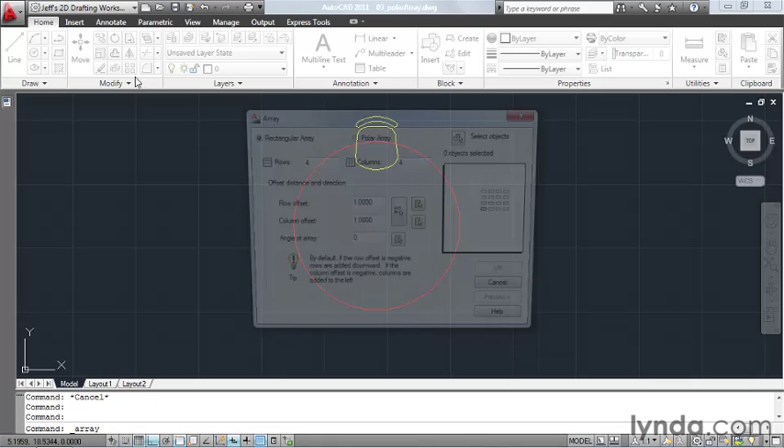Array is located in the Modify panel of the ribbon. The icon's right here. When I click to launch the tool, it brings up the Array dialog box. This is where I get access to all of the settings that I'll use to build my array.

Notice there are two types, the rectangular and the polar array. We're going to look at the polar array right now. Polar array allows us to create copies of our entities in a rotational pattern.

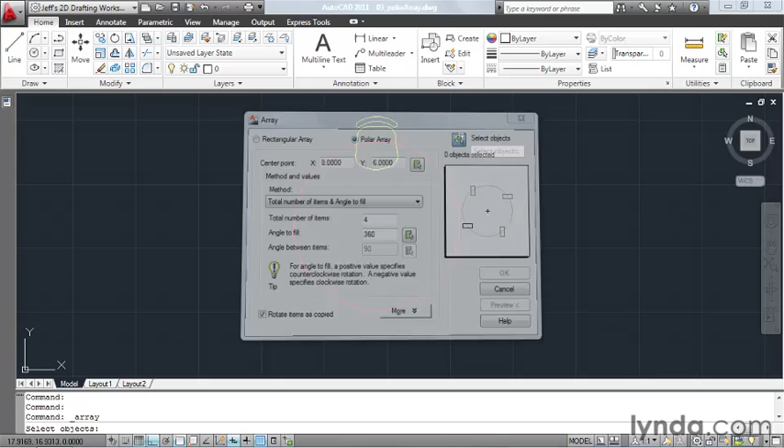I'm going to click Select Objects, and then I'll select the object I'd like to copy. In this case, it's the chair. Then I'll right-click. Now let's take care of the center point. The center point is the point at which I will be copying my objects around.

I can enter a coordinate here, an X and Y value, or if I click this icon, I can pick a point on screen. I happen to have a running object snap set for center, so I'm going to select the center of this circle.

Now let's take a look at the total number of items. How many objects do I want when I'm done? Currently this is set to 4. I'm going to leave that alone for right now. Angle to fill, 360 - this means I am creating my copies around a full 360-degree circle.

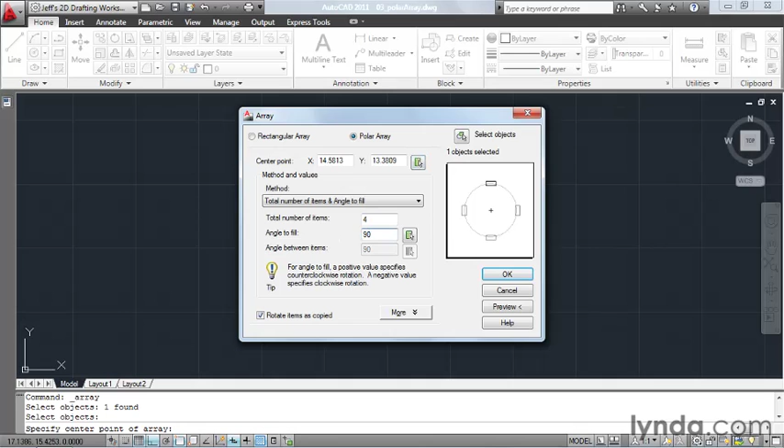On the right side of this dialog box, I can see a rough preview of what my array is going to look like. If I was to make a change, for instance, I'll change my angle to fill to 90, and press Tab to accept that value. We can see the preview change over here. I'm going to change this back to 360, and then I'll come down and click Preview.

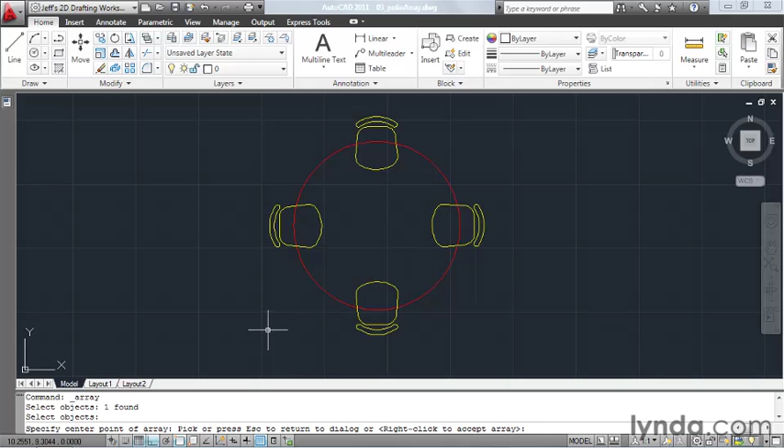And this looks pretty good. Take a look at my command line - notice we're in preview mode right now. That means if I like the array, I can right-click to accept it, or if I want to make a change, I can press the Escape key to bring back the settings.

Now, I think we can fit a few more chairs around this table. I'm going to set my total number of items to 6, and I'll click Preview. That looks a little better. I'm going to right-click to accept my array. I'm sure you'll agree that making copies this way is much faster than doing them manually.

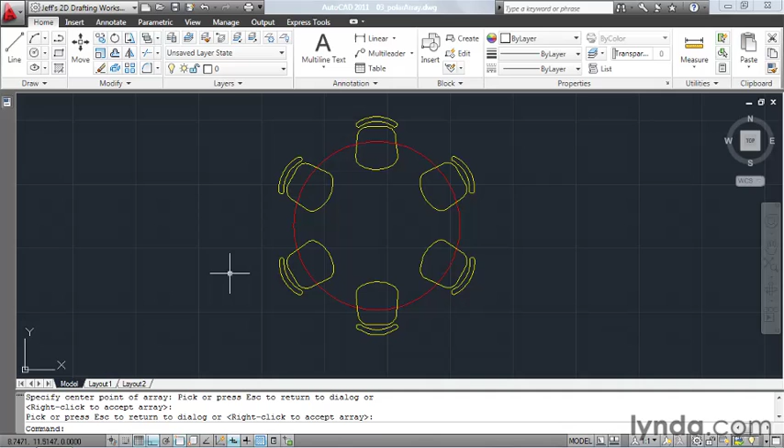Now that we understand the workflow behind the polar array, let's try and use it in a practical example. I'm going to pan the drawing over. On my screen, I have a finished drawing of a motorcycle sprocket, and I also have an unfinished version.

At first glance, it might appear like this sprocket would be complicated to draw, but in fact, the only geometry that we really need is this geometry that we see on the left side. The rest of this part can be completed using polar array.

Let's take a look at these holes first. In the finished example, it looks like I need 5 sets. So I'm going to launch the array command. This will be a polar array.

I'll click Select Objects, and I'll make a window selection around these circles, and right-click. I will then select the center point of my array - that will be the center of this circle.

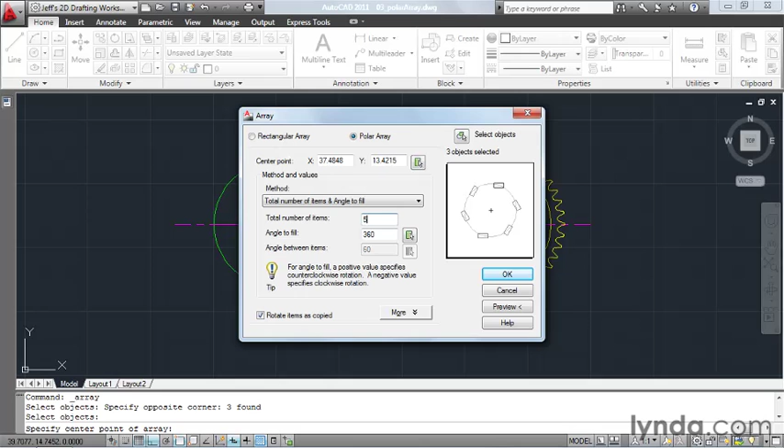Total number of items will be 5. I'll leave this at a full 360 degrees, and I'll click Preview. That looks perfect. I'll right-click to accept the array.

Finally, let's take care of the teeth. This finished sprocket has 42 teeth. And as you can see, I've already worked out the geometry, and I've created a single tooth and a single gap. If my calculations are correct, we should be able to create 42 teeth around this part, and they should all meet seamlessly end to end.

I'm going to relaunch the array command. I'll click Select Objects, and I'll window this geometry, and then I'll right-click. I'll select the center point of my array, the center of this circle. Total number of items will be 42.

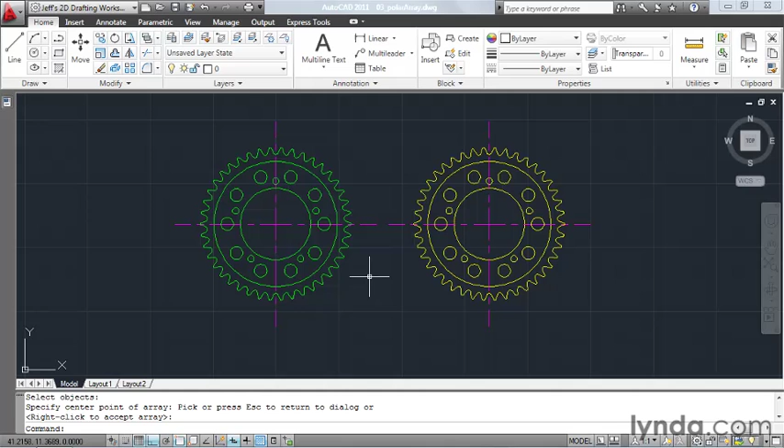Let's click Preview. Everything looks really good. I'm going to right-click to accept the array. Keep your eyes open for objects that fall into a rotational pattern. A polar array can save you a lot of time over creating manual copies.